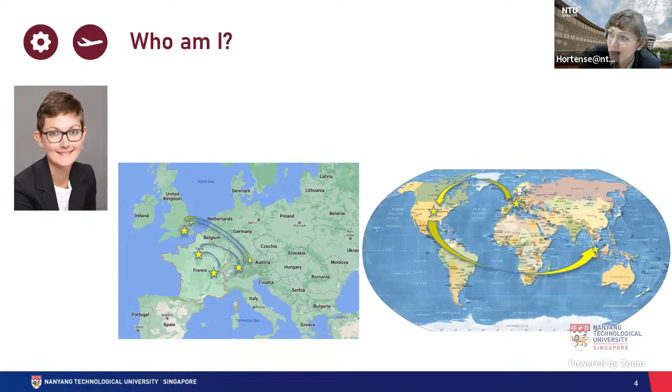Before I joined MAE, and so I did my studies in Europe, I also worked a little bit in the USA and in Singapore. And I was really excited about Singapore, and then I wanted to stay, and I had the opportunity to join the School of MAE at NTU.

So at MAE, I teach courses that are related to materials and manufacture, such as fundamentals of material science and engineering, which is in year 1, manufacturing processes in year 2, net shape manufacturing in year 4.

I also supervise, as many of my colleagues, engineering, innovation, and design projects, which students take when they are in year 2 or 3, and final year projects that students take when they are in their final year, so in year 4. And usually students are really excited about these two kinds of projects, because it's really the moment when a student can really apply their skills and work on problem solving, as well as really doing research and development of new technologies.

I also have a research group with PhD students, postdoctoral students, and researchers, and I like to focus on 3D printing, composites, ceramics, manufacturing, and testing. So here you can see pictures that are actually taken in our lab, where our students can be doing modeling on computers. They can be designing new devices and robots, or doing also some chemistry or biology as well.

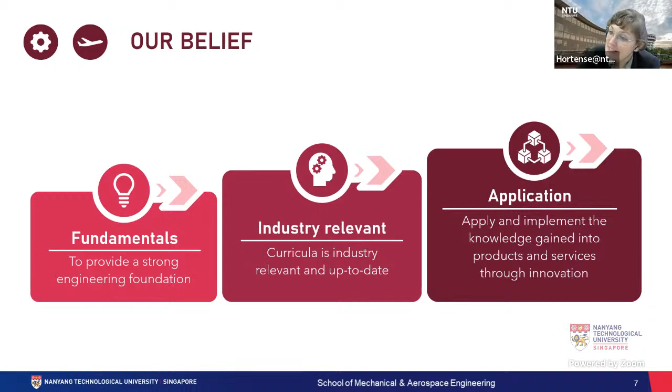So what engineers do: engineers devise solutions to problems in a clever and creative manner. They are the link between scientific discoveries and the applications of these new ideas to the world. The value of engineering is therefore the creation of a better world, which I believe everybody wants. So if I summarize this from my perspective in very short keywords, I would say that engineers solve problems, and we need them to address global challenges.

Examples of these challenges are, well, currently this COVID pandemic. We know that engineers are devising amazing tools to help us work in this new environment and solve this problem. There is global warming and pollution, you are well aware of this, and already in Singapore we have many innovations to help us solve this global warming and pollution. Another global challenge can be aging population, and I'm sure you can think of many other global challenges that we have to face. So for all of these challenges, we need engineers to provide us with solutions.

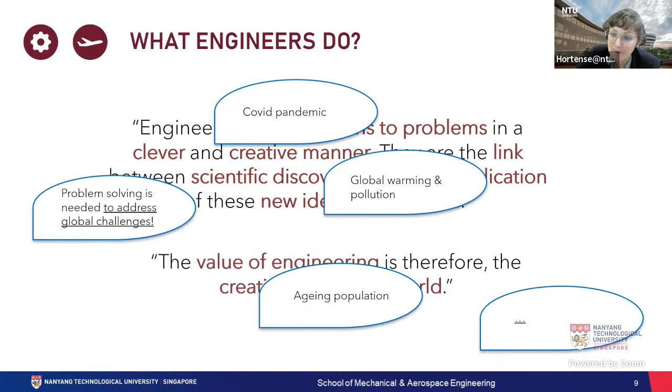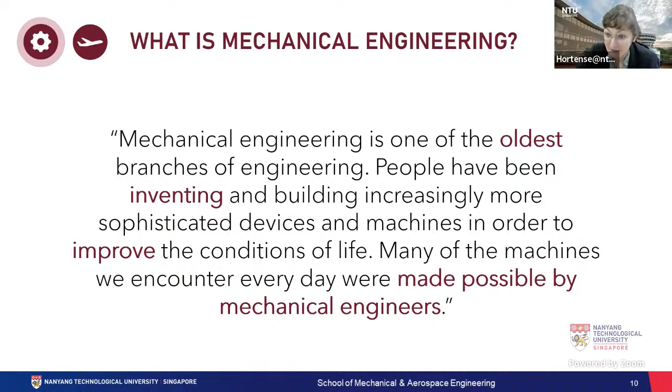Mechanical engineering is one of the oldest branches of engineering. People have been inventing and building increasingly sophisticated devices and machines to improve the condition of life. Many of these machines we encounter every day were made possible by mechanical engineers. Like right now you're watching on a computer screen - this can only work because engineers fabricated the screen and keep making them more advanced every year.

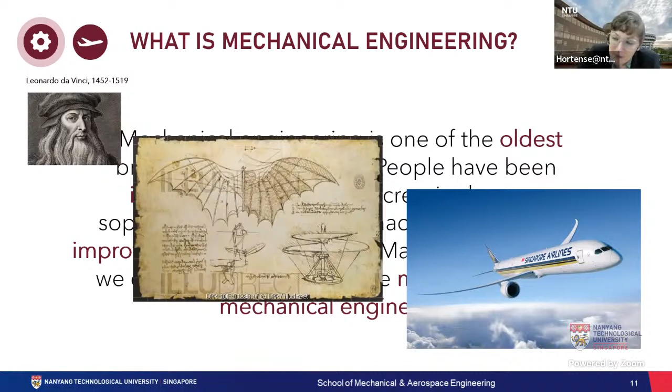I'd like to show you how old mechanical engineering is. I think one of the first could be Leonardo da Vinci - you heard of him, right? He was designing, for example, those kinds of aircrafts. And although these look very different from our airliners nowadays, it has been a very long thought process to go from these ideas, prototypes that were not really working, to the aircraft that we have today.

So here in Singapore, engineering is really important. This was highlighted by Mr. Teo Chee Hean, the Senior Minister and Coordinating Minister for National Security. He said that engineering is vital to Singapore as it enters the next phase of development in 2019. Speaking at the launch of the exhibition on engineering at the Science Center, Mr. Teo also encouraged more young people to pursue a career as an engineer or a scientist.

If you look at the figures from the Ministry of Manpower, in 2017 - a few years back, but still very valid today - civil engineers, industrial and production engineers, mechanical engineers were occupations with the most job vacancies in the professional categories. So in short, there are job opportunities for engineers, and we need engineers, especially here in Singapore.

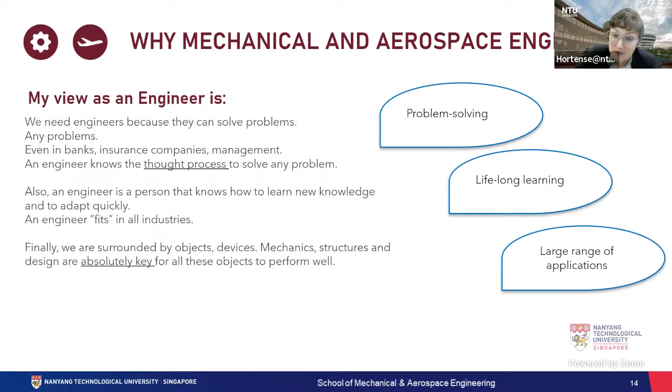So these were my view of what engineers are at MAE.

Now, what will Singapore be in the near future? You are choosing the future path for your learning journey to prepare yourself better. A report published on Today Online on 30 March 2021 highlighted that engineers and product managers were very much sought after by Singapore and regional tech firms amid a talent crunch in Singapore. There is a talent shortage in the technology sector, and workers who take up such roles in Singapore are paid much higher than their Southeast Asian counterparts. So keep in mind when you choose your future career that sectors like technology and engineering may have more job opportunities in the future.

This is my point of view because I'm a foreigner here. I'd like to highlight that Singapore may seem like a small country compared to a much larger country like China or the US. But despite being small, Singapore has very good talent and often makes a world impact. So here are headlines I took from a French newspaper, because I'm French.

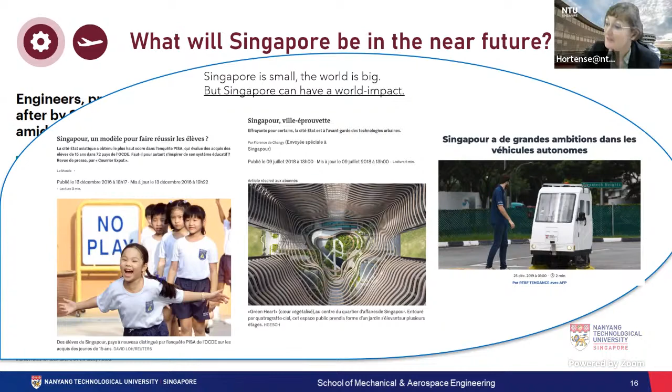And most of this, these are also areas where students at NTU MAE are already in contact with through the different projects that they make, and also because they are in direct contact with professors like myself and my colleagues, whose daily occupations also involve researching in these areas. So if you're like me, you would find this pretty exciting.

More specifically, what students do at MAE - they also innovate a lot. This is a team from MAE students that won the Shell Eco Marathon in Asia in 2018. They developed this very fancy car that has a specific design, and they made it using 3D printing. So here it's a combination of mechanical engineering and also a lot about design.

We very much value experiential learning, and we have a new innovative approach for hands-on machining, where the idea is to provide students with practical experience in machining. This will be for the entire cohort of MAE students in their second year. One student will be trained on one machine tool for a total of 6 hours. With this, the student can learn hands-on practice in machining, features of machining tools, and how to perform various types of machining processes such as milling, turning, drilling, tapping, and also get some introduction to robotic applications for finishing operations. The idea is so that students are able to operate and perform machining tasks independently.

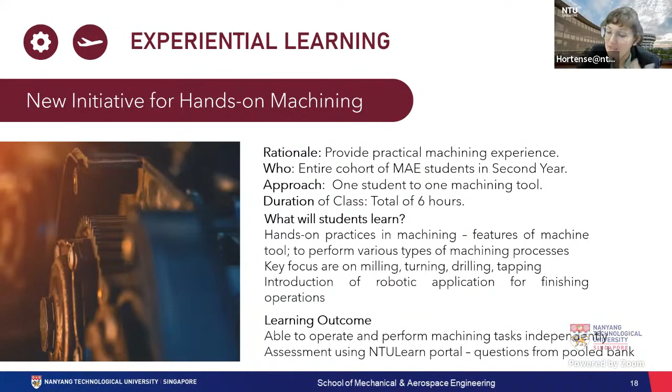From the point of view of the students, it's quite exciting because it's hands-on practice, right? You actually acquire a new skill, but it also develops your thought process, because usually when you do this kind of task, you're thinking, oh, why is this difficult? How can I improve? Maybe I could do the drilling a bit differently, or maybe it would be nice if the machine would be better. So not only do you develop these skills, but it also develops your critical thinking, which is also very interesting.

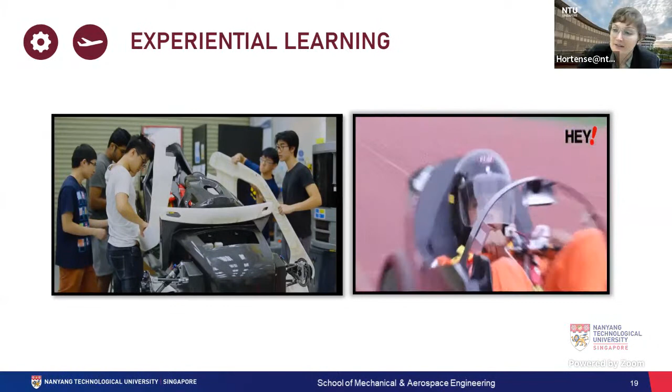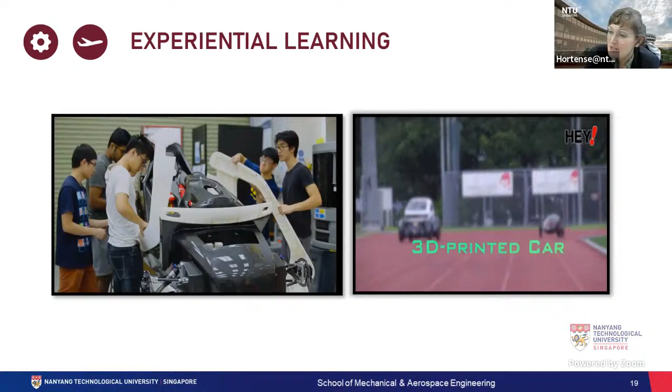So these are the cars that ran in the Shell Eco Marathon I was showing earlier. The students were able to design such cars because they already had some skill in machining, as I was highlighting just earlier. So by acquiring these skills, you are able to address real challenges. And when you do these kinds of real-life projects, you have the skills to actually solve the problems and develop prototypes.

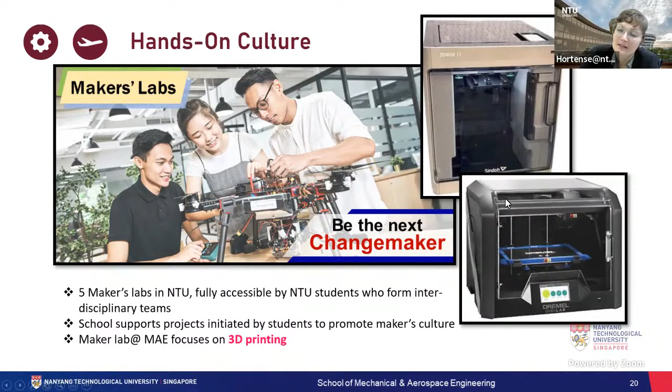In our hands-on culture, we are very lucky at NTU because we have 5 maker labs that are fully accessible to NTU students, giving opportunities for students to form interdisciplinary teams with other schools at NTU. At MAE, what we like to focus on is 3D printing. Here are some 3D printers that students can learn and access when they need to.

This also gives a lot more industry exposure, because our maker labs are, for example, with Dyson or HP, and we have engineers and researchers from these two industries in these labs, who are usually very enthusiastic to show students how their machines work and what they can do.

We also have partner research labs, so the professors and your future lecturers may work in these labs and collaborate with engineers from industry. From your perspective, this is really cool, because maybe you'd like to do an internship there or have a project there, so that in the future you could be hired by this company. This is a great opportunity.

We also like to give students early research exposure. We call it URECA Projects, for undergraduate research experience on campus. This is for students in 2nd and 3rd year, and they get to choose from 800 different research projects, which can also be multidisciplinary, across schools. They go to the research labs and carry out a research project of their interest, which is a good opportunity to get research experience in a different field or a topic that is completely new.

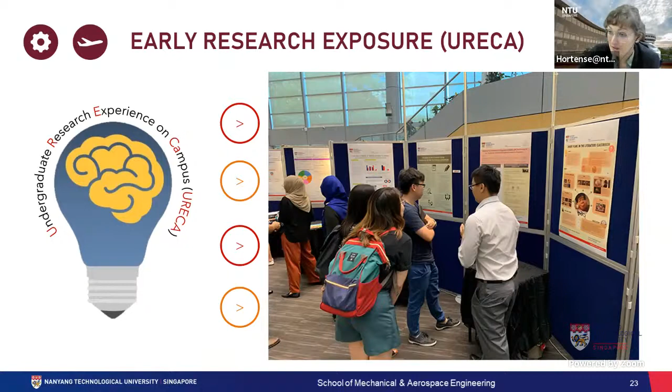There is also a chance to be conferred the title of NTU President Research Scholar if you do really well in this research project. At the end of these projects, students present their findings in a poster, either in person or at an online event.

A little bit more detail about the curriculum - what we offer at MAE. For mechanical engineering, we also have some shared or refined majors. For example: mechanical engineering and economics, mechanical engineering with a minor in business, mechanical engineering with a second major in business, and mechanical engineering with a second major in society and urban systems.

As you see, we like to think of a mechanical engineer as someone who is developing something for society, for solving a problem, which is why mechanical engineers do not only need technical skills, which you will get for sure, but also it's good to have ideas about leadership, business, and society in general, which is what this kind of curriculum provides.

There are three different tracks that can be taken at MAE. There is one mainstream track up to year 4. From year 2, it's possible to choose a specialization in design or a specialization in mechatronics - mechatronics being about how to develop machines and automation, this kind of technical skill.

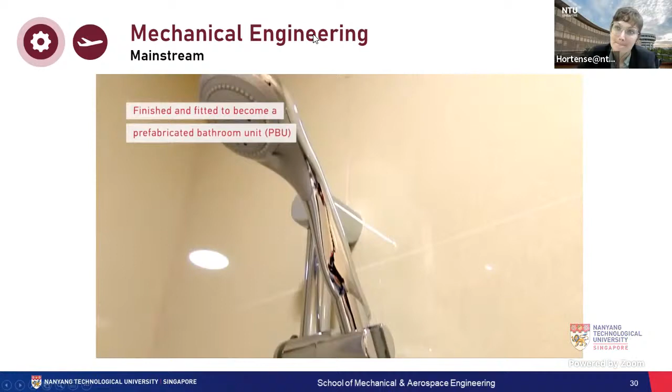So here I'm going to show you a very short video about 3D printing, which is one of the key topics that we are very excited about in mechanical engineering.

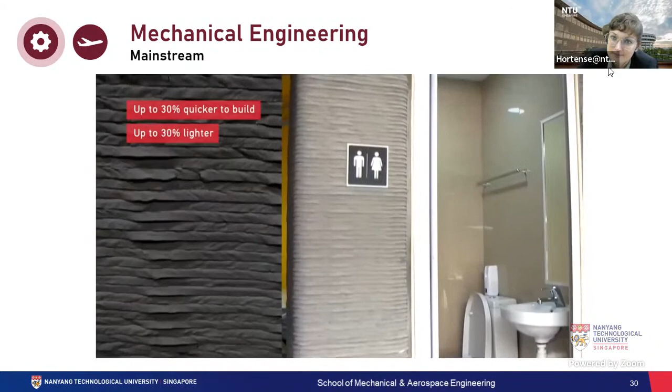So what you've just seen is the 3D printing of concrete to make a bathroom unit that is cheap and can be built anywhere, done using 3D printing. This was developed by my colleagues at NTU, where mechanical engineering students contributed as well to this project. One of the topics we are very excited to teach students is how to fabricate such an innovative solution for cheap bathroom units.

Now let me move forward to the other streams. The other stream I was talking about is the design stream, which can be chosen from year 2. The design stream is also very interesting. It's multidisciplinary, with a partnership with the School of Arts, Design and Media at NTU. There's an emphasis on creativity, technology, and design methodology, and it is aimed at training design professionals competent in engineering.

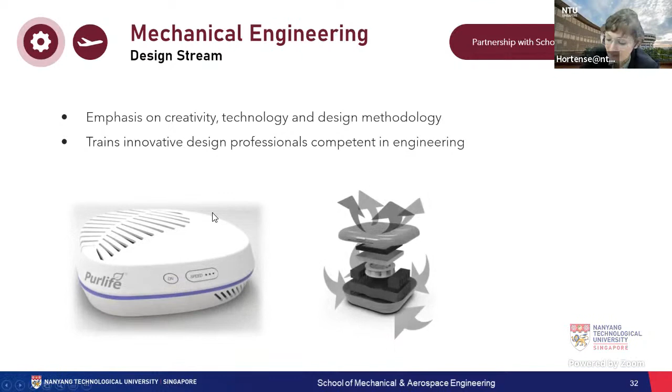Here are some examples of designs. This is a specific, new and innovative Braille device with a lot of functions incorporated into it. I will share a little bit of detail with the video in a short while. Basically, what students get to learn by developing such a tool is how to identify a problem, how to develop a concept, and then how to prototype it and learn how to fabricate it, as well as incorporating programming and electronics that play a key role in its application.

So here the problem was: for example, if you have difficulties reading, can you still read without vision? So using a tactile method. There is also the problem of increasing the privacy of communication. And when you look at your smartphone, current devices are quite bulky, right? They're getting bigger and not always very portable. So here were three of the problems that were highlighted.

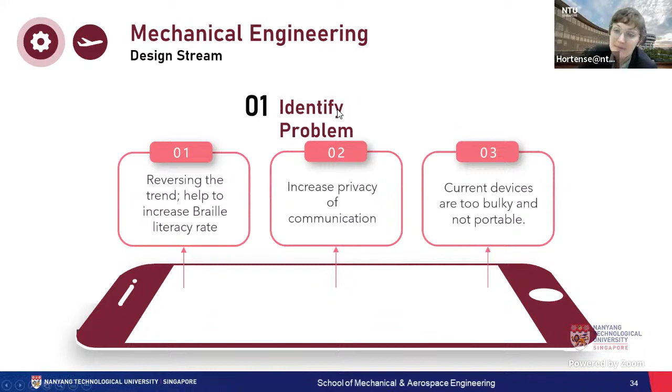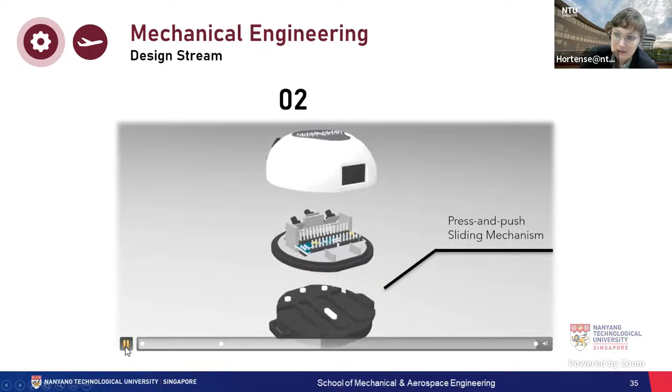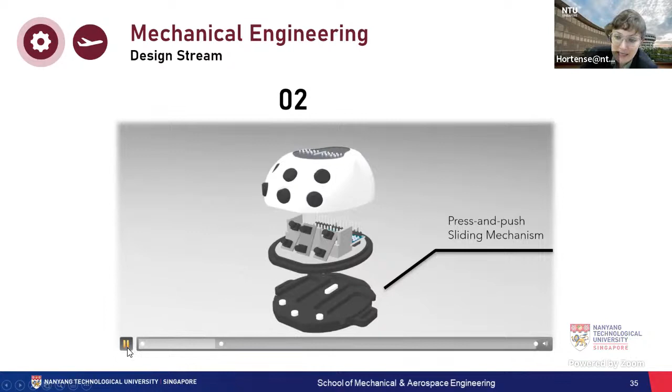And so for the concept—okay, basically the idea is to get the reading through the fingers, through this button, and then to have a press and push sliding mechanism to operate the device. Inside, we have everything connected together; it's basically a layer top-down assembly. It's easy to service and maintain because you just open it, and it has a very nice ergonomic design so that it can fit easily on the hand.

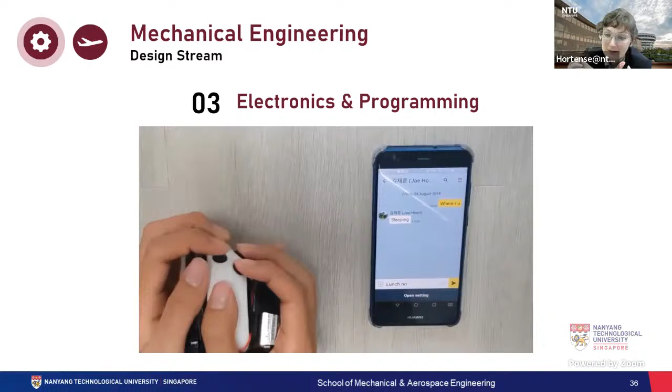So what you see is the solution. Now it's operated just by tapping with the fingers. And you can appreciate the ergonomics—it fits very nicely in the hands. It's wireless, it communicates to the smartphone interface, so that it can really translate what the person was typing just with these keys, without needing to see a screen, but then it translates it into words so it can also just speak to someone.

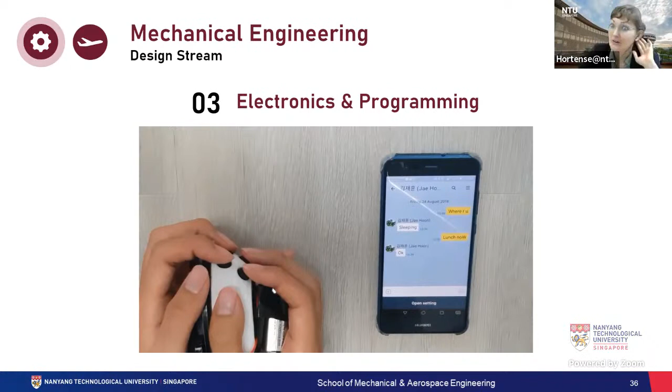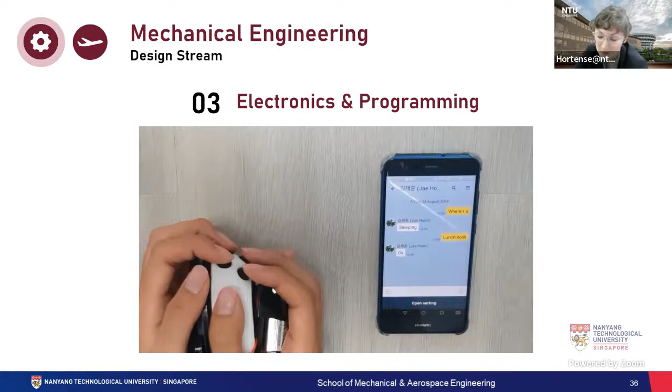So if you are vision impaired, or even if you are in a dark room—like in a cave, right? We had some incidents in the news, people stuck in caves—this could be a tool. Easy to communicate without the need of seeing, very small, you can carry it with you all the time. So this is just an example of what you would get to learn to do, or be able to do, following the design stream.

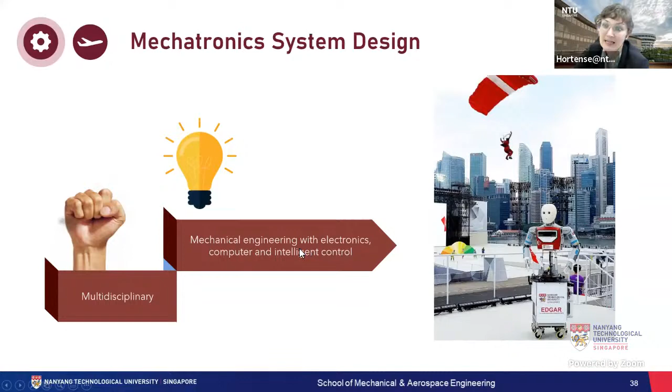Finally, the last stream is about robotics and mechatronics—how to design such kind of robots. This stream is exciting because it's also multidisciplinary: you get to learn mechanical engineering with electronics, computer science, and intelligent control. Here is a team of students where they fabricated a robot.

I'm toward the end of my presentation, and I would like to summarize the key points that make it exciting to join MAE. Not only will you get to learn about design, robotics, engineering, and mechatronics, but you will also learn how to learn. You will have the opportunity for hands-on, industry-relevant experience, and your skills will be transferable to other disciplines.

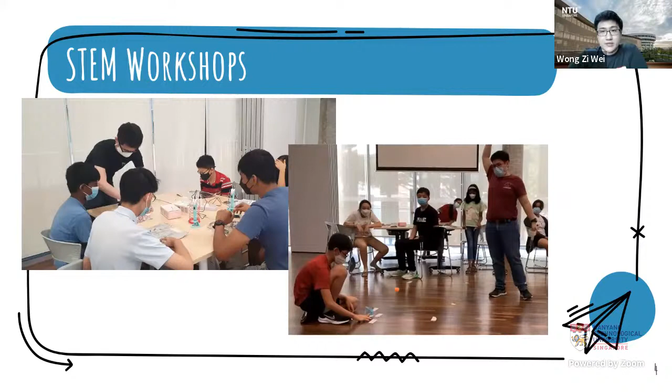Now let's go into some pictures because it's hard to imagine with just talk. These are from a 3D printing workshop we ran with TJYN, the Taman Jurong Youth Network, for their kids, who were around 11 to 13 years old. It was an event for them to experience 3D printing pens, which you can see here, and to expose them to 3D printing so we can build interest in STEM early in their life.

We also have a robotics workshop, run at a primary school, to let students experience a line tracing robot - actually an Arduino programmed robot. For those who don't know, Arduino is a programmable circuit board you can buy on your own, and it's not very expensive. This lets them experience not only building the robot but also coding, and how code affects a robot's behavior.

On top of this, we also have a new style of workshop: aerodynamics workshop. This exposes kids to aerodynamics principles, laminar flows, and lets them experience an aerodynamic car.

We got them to come down and share with students what they are looking for when hiring, what skills they prioritize now with what they like to call the new normal. This was very well received. We had undergrads, graduating students, and even postgrad students coming for the event and finding out what HR is looking for in companies.

Another is our leadership speech series. This recently happened. This event is a series we've done for a few years, basically to invite leaders from different engineering related organizations. For this year's, we invited the CEO of Lionsport, a startup in Singapore, Mr. Justin Ang, our Director of Security and Resilience from MCI, and also Mr. Fabian Tator from Bolloré Logistics. We invited them down to share their perspectives on leadership and skills in the working world.